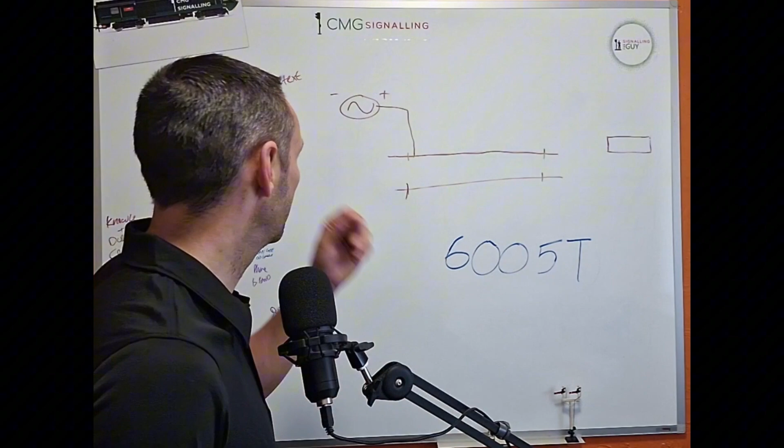And you will still see it in large parts of Scotland where the whole thing hasn't been relayed and reconfigured into letter names, but there are some letter name tracks in Scotland, plenty of them. And this is just my personal preference. So we've got 6005 track circuit.

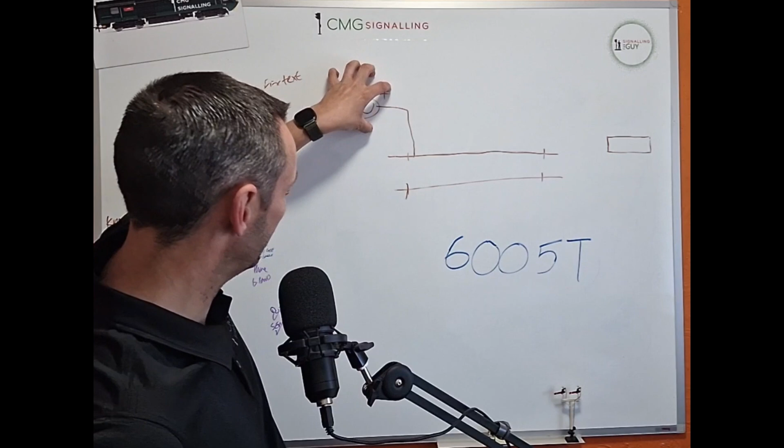So our track circuit is going to be the power supply, the rails divided up, electrically insulated from the adjacent rails. Remember, there's nothing impeding the wheel flanges here, so you can still run right through this track, and unless you knew what you were looking for, you wouldn't really see these.

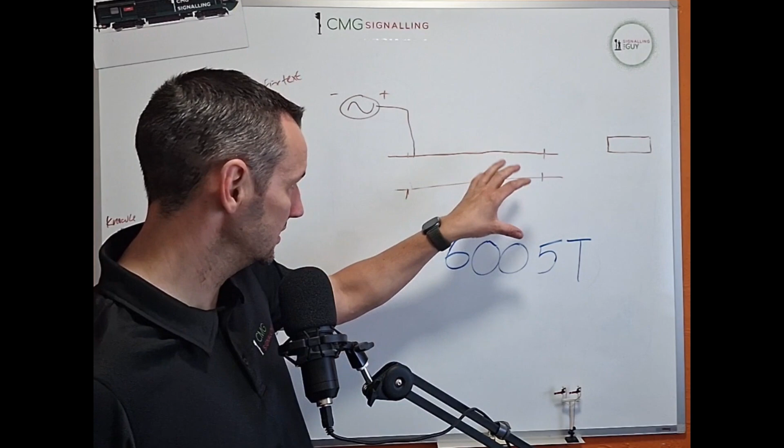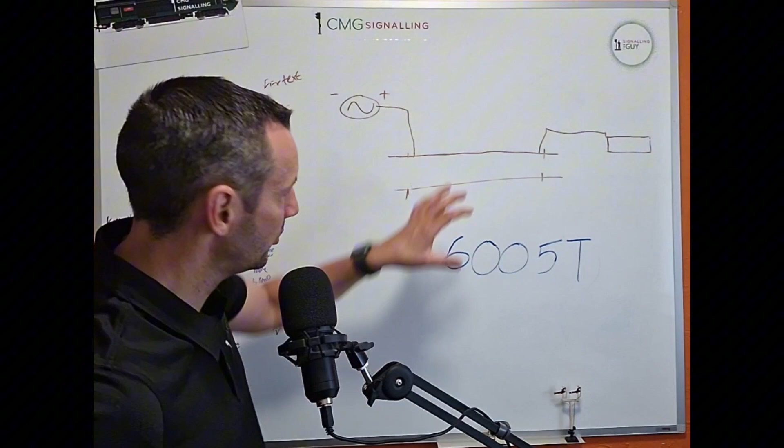And at the other end, no more than 1,000 metres - again, broadly speaking, one of the limitations on track circuits is length, so no more than 1,000 metres. And we take our power supply and we feed it from the rails into a relay. Now this is where it gets interesting.

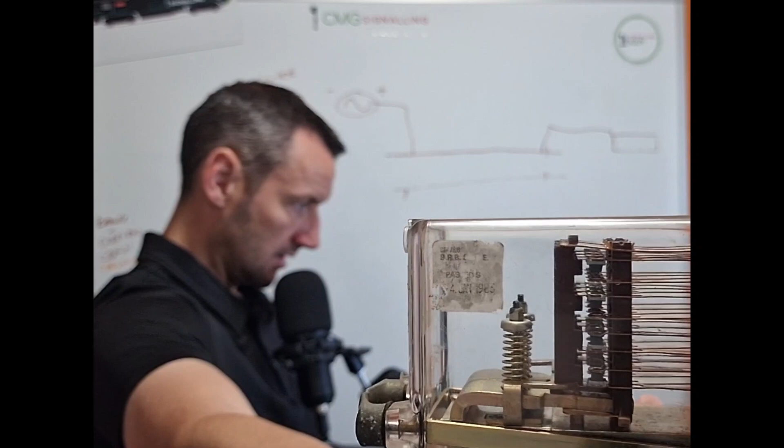So when I energize the coil, that gap is going to shut. Electromagnetism is going to force that gap shut. And then, as you can see at the top, if I position this properly, you can see that there's some contacts in there, and they are open at the moment.

So they are front contacts, which are open when the relay is de-energized. Listen, it's not energized, it's not plugged into anything, so it's de-energized. It is down. So when signal engineers say it's down, we mean that the back contacts are made - you can see them at the bottom. When it goes up, that brass arm will flip up towards the coil, and it will push those contacts at the top closed. That's what we call the relay being up.

So relays are used for other things other than track circuits, so we say relays are up and down. When we talk about tracks, sometimes we still say the track's up or down, being a bit lazy with our language. What we mean by that is that it's either clear or occupied. Right now, this track circuit is clear because there's no trains on it.

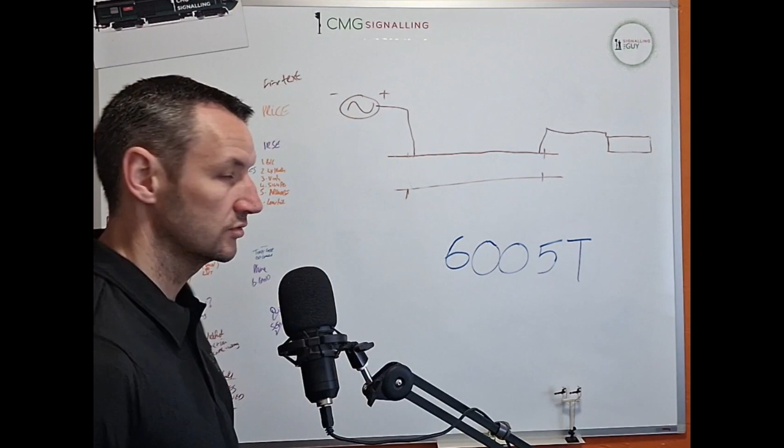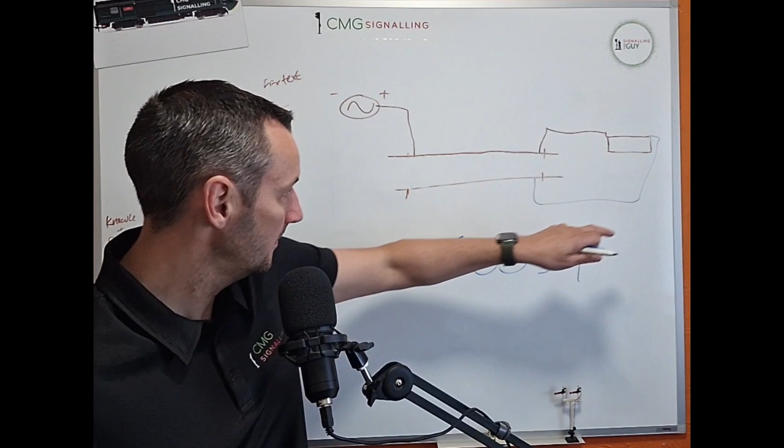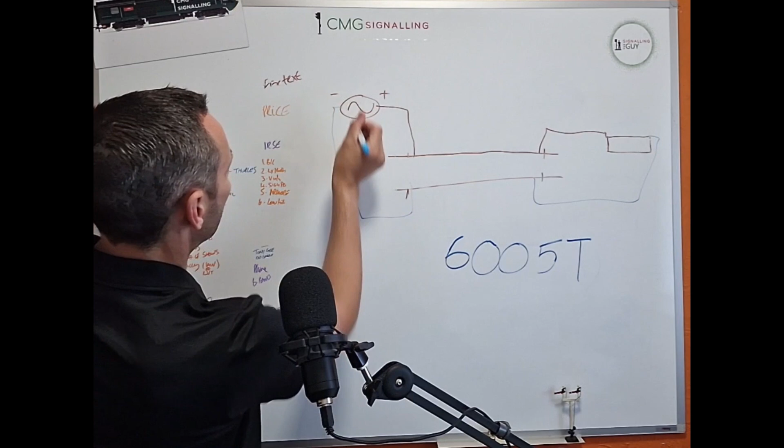But it's not a complete circuit yet. So to complete this circuit, the other side of the coil also has to be cabled from a relay onto the track. Of course your track are contiguous conductors, and at the opposite end of the track we simply feed back to the supply, and that is our full circuit. So right now we have got a full circuit, our track circuit is clear, and our relay is up.

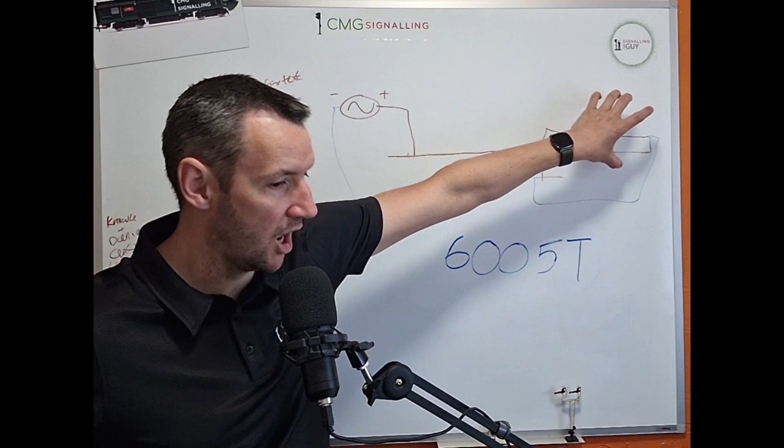So how are we going to change that? Well, there's a number of ways we can change it. So that's how our track circuit operates normally - spends most of its time clear with the relay up.

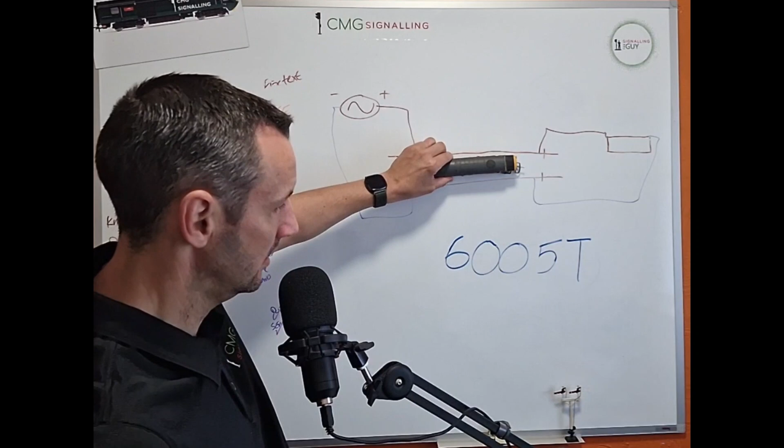Now we're going to bring along our train, and this train, like most trains, if you look underneath it, the wheels are joined together and they're metal and they conduct. So when we put our train across our track circuit, what it does - keep in your mind our train is still on our track.

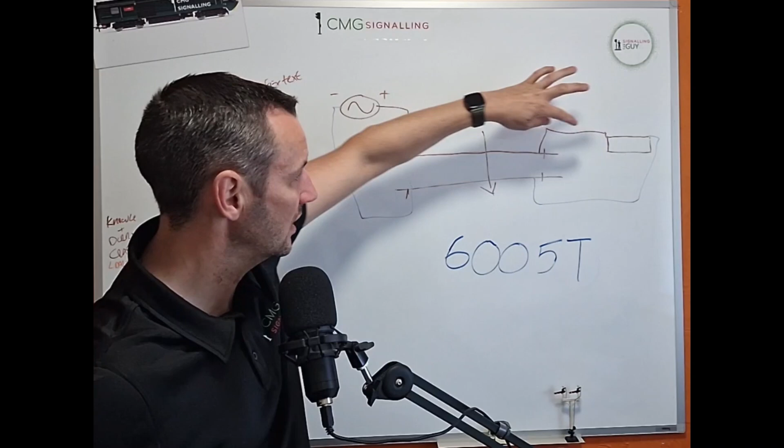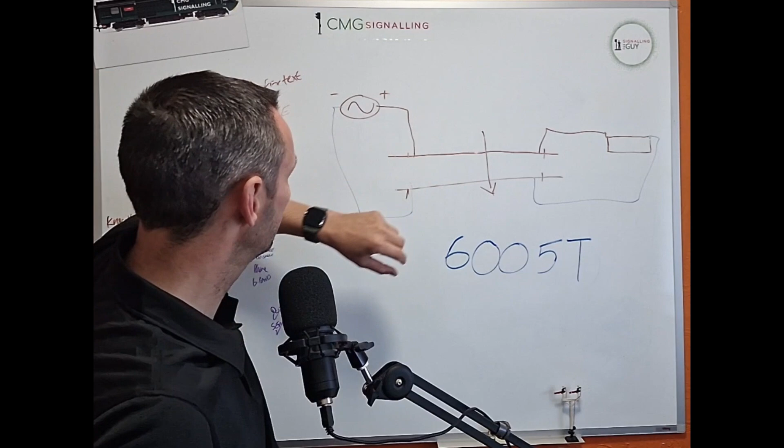It creates a current path across our rails. These rails aren't joined in any way - they're electrically insulated from the rails adjacent to them longitudinally, and they're also insulated from the rails across them. But the train's wheels come on there and they short out the rails. That means you don't need to know a lot about electricity to know how this works.

But it means that electricity, if you want to think about electricity as lazy, it wants to take the shortest path to get back to the supply. So it doesn't want to go all the way up here and through the relay when there's a nice short path here, and it can go all the way back to the power supply the easy way. If you want to be a little bit more technical, it is about choosing the path of least resistance - that's why I say it's lazy. There's more resistance going this extra length of rail through the relay coil than there is going the nice short path.

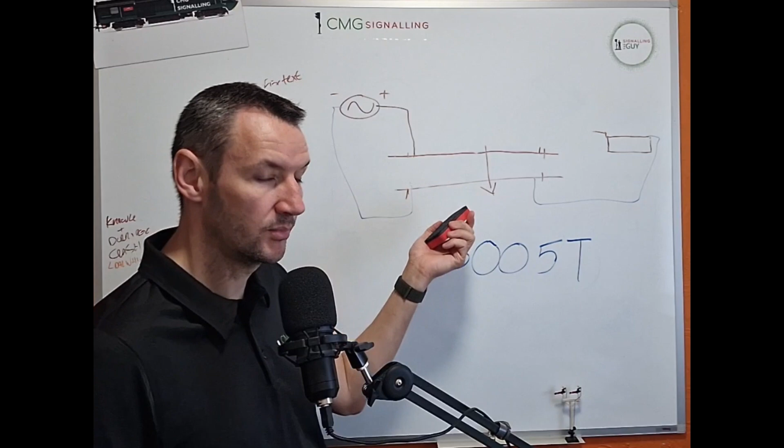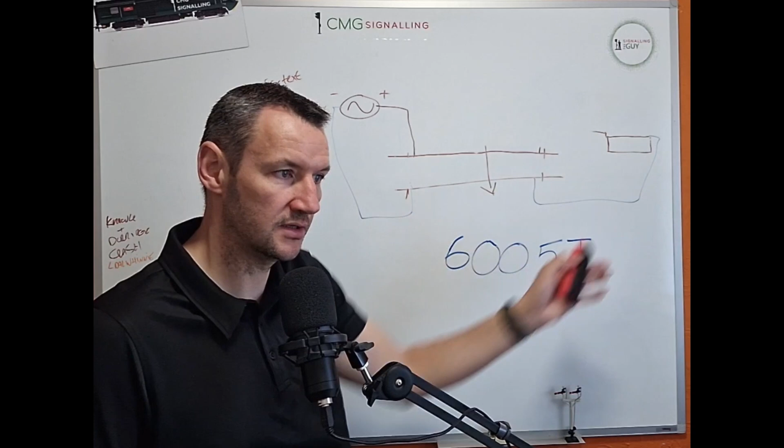So that is one way in which our track becomes occupied and our relay drops. Now we use the contacts in the relay to tell us what situation the coil's in - is the coil energised or de-energised? Outside of equipment failure, that operates pretty well in thousands of instances day to day, from not quite Land's End to John O'Groats, but a large section of the UK railway.

I said that length was one of the limitations of track circuits. There are some other limitations - some other things that will occupy your track circuit that aren't actually trains.

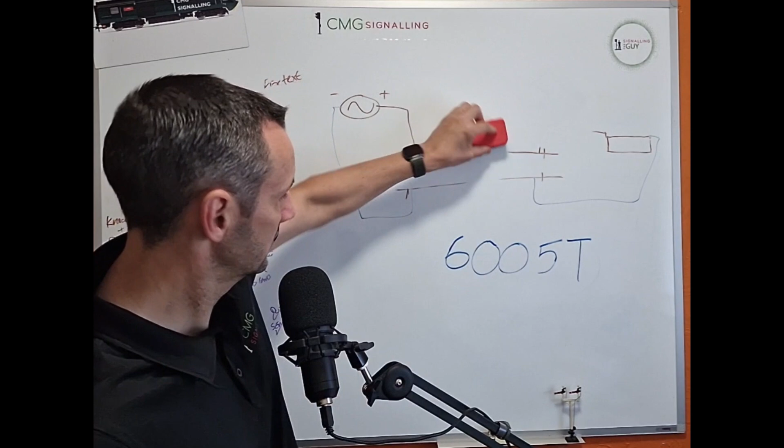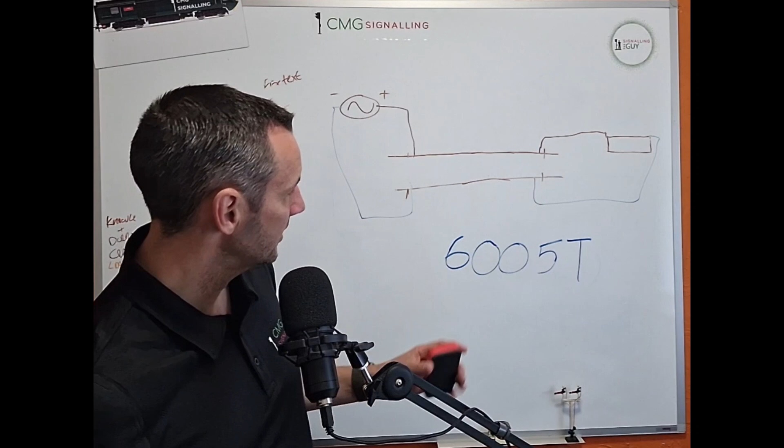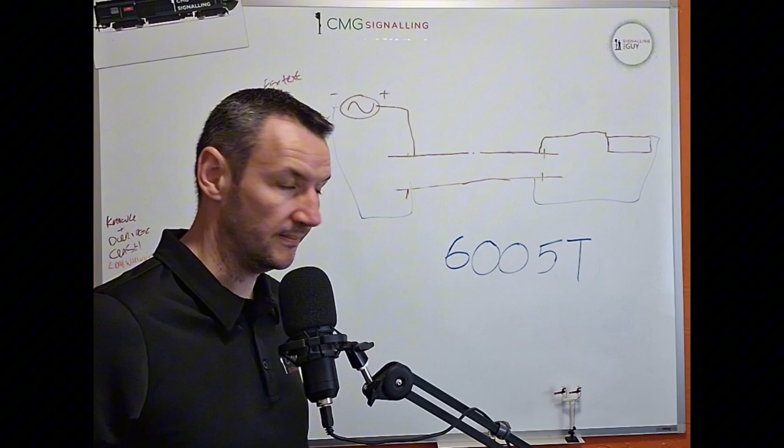So if we reinstate our clear track circuit with our relay up, relay energised - any break in the rails will drop your track circuit, will occupy your track circuit. In some cases that sounds like a really bad thing, but in some cases that's really good, because if you've got a broken rail, you want to know about it. There is also something which is becoming more and more common and an increasing problem.

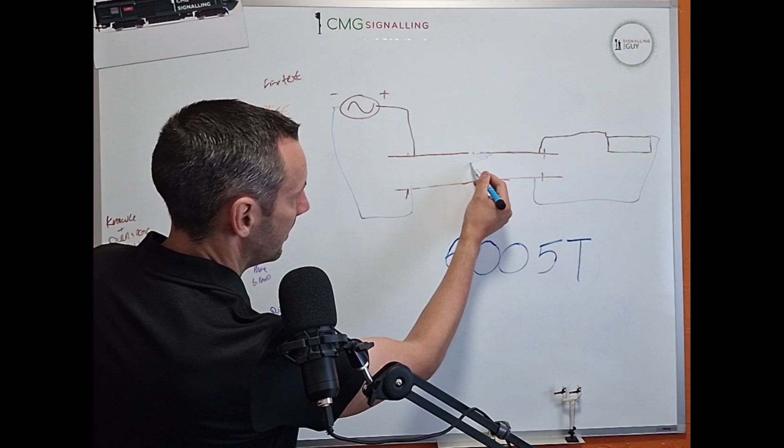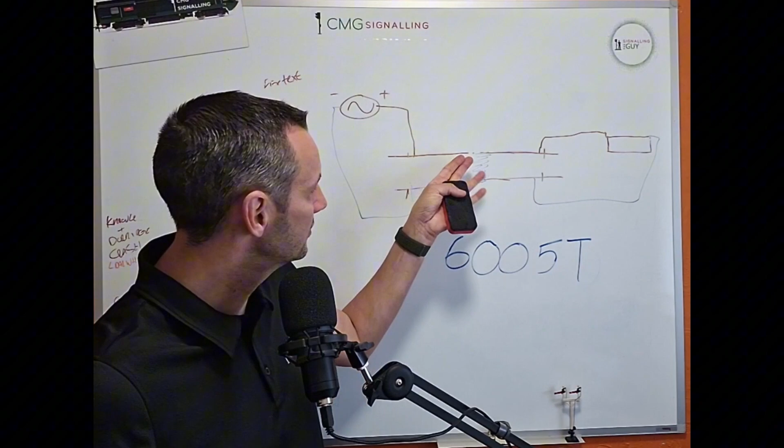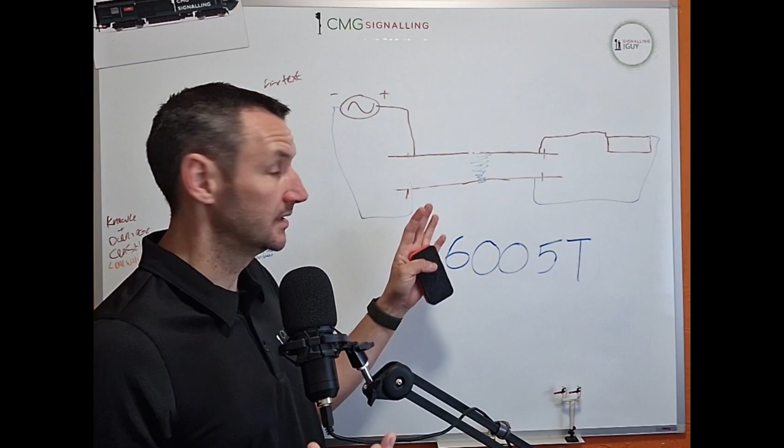The blue stuff, water. So flooding in a track circuit will actually short it out, if it's flooded enough and you get a path with low resistance, remember water conducts electricity. So if you get a water path between your rails, a flooded bit of your railway, your track circuit's going to be occupied. Is that a bad thing? Depends how bad your flooding is. If your flooding's really bad and your track circuit's occupied and trains can't run through it, not a terrible thing.

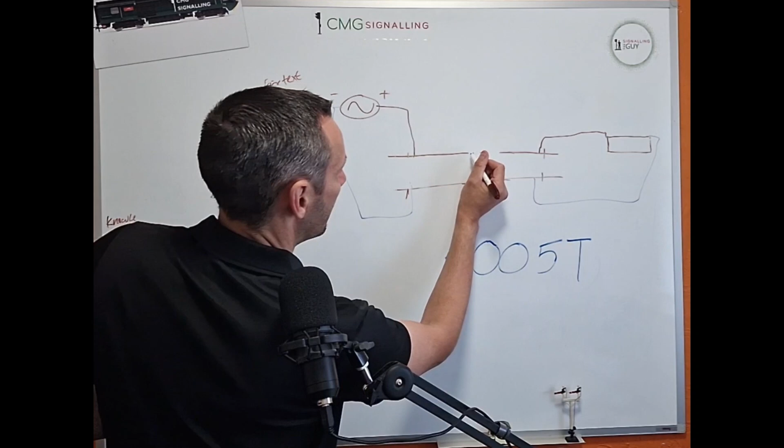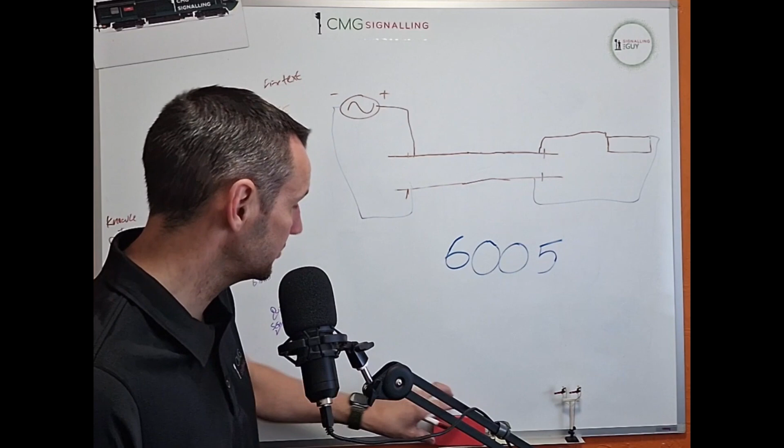Now if we reinstate our track circuit, overcoming the limitations of our track circuit, one thing we can use is the axle counter. So track circuits are a method of train detection, so are axle counters. So what we do in the instance of axle counters is we fit what's called count heads to the rail.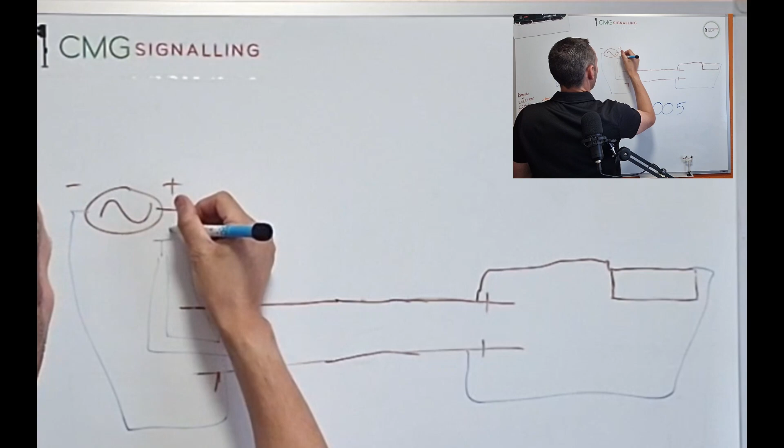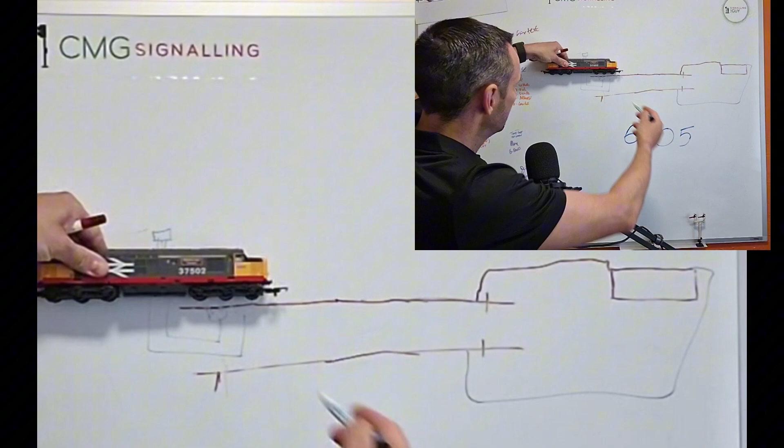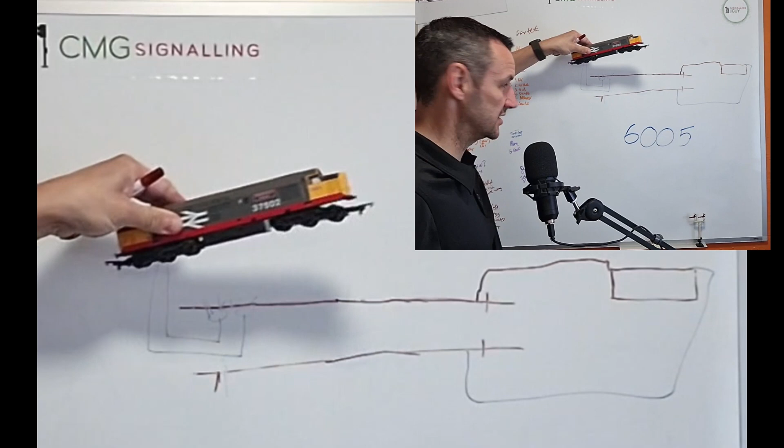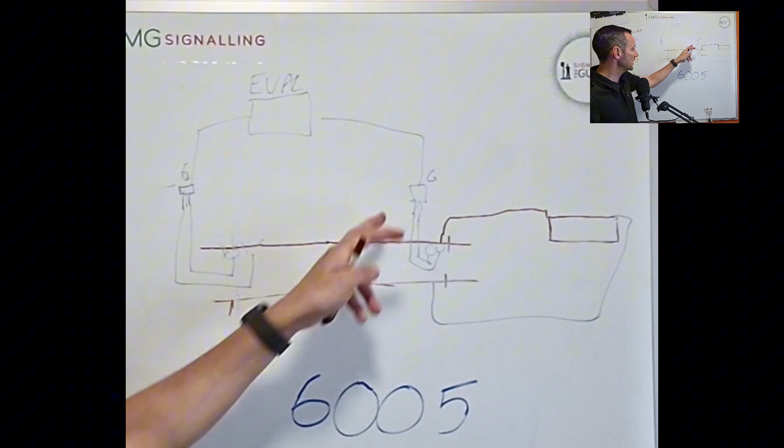Associated with the same brains, which is called an evaluator for an axle counter, there's another set of count heads at the opposite end of your train detection section. Remember, it's not a track circuit, it's an axle counter. So again, our 6 axles pass over the count out head, and that counts up to 6. Or effectively what it does is count from 6 at the evaluator back down to 0. So 6 wheels in, 6 wheels out, and the evaluator decides if all the internal equipment is operating correctly, then a full train has passed through.

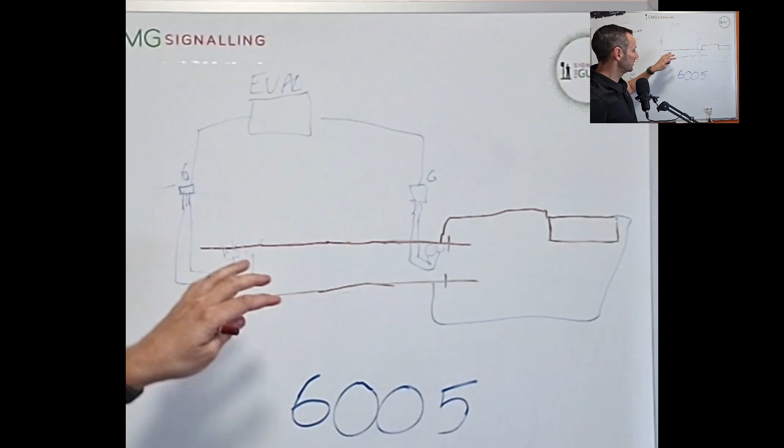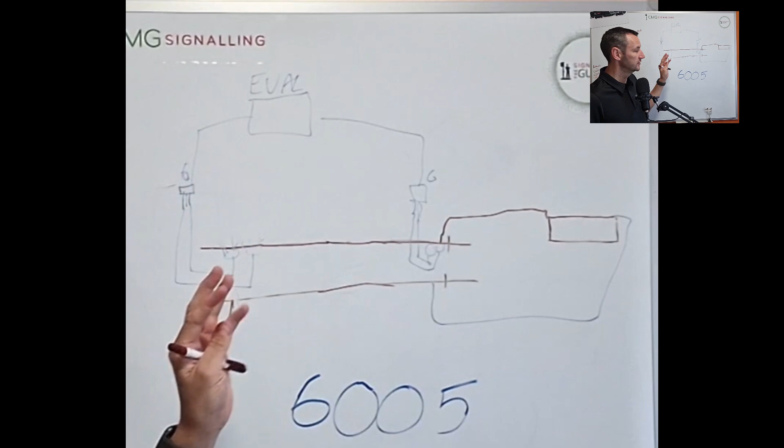We can be reasonably confident that if 37502 was hauling 20 coal wagons, each one of those axles would be counted, and if a wagon was detached and left in the middle, its wheels wouldn't be counted out at the end. This seems very simple, but it's a very reliable way of detecting train movements.

There's a slightly different nomenclature for this. So 6005T now becomes brackets X, to let you know that it's an axle counter when you're looking at signalling drawings. And one of the things you might have already picked up on is this: 6005 no longer detects broken rails, and 6005 no longer detects flooding.

One of the first applications of axle counters was in areas known to be susceptible to flooding, coastal places, and examples like the Severn Tunnel. So here we are, our setup on the day. Now it's really important that we figure out how it should work first. You can see inside the Severn Tunnel, we've got X's, 6005, 6007 - these are not the real numbers, just chosen for this exercise. Those X's are axle counters because the tunnel is too wet for track circuits to operate reliably for long periods. So what they did was bring in axle counters and trial them.

If you think back to the explanation of how track circuits and axle counters work, you can have them both operating at the same time on top of each other - they don't actually interfere with each other. So that's what they did. They trialled these by running them together for a year to make sure the axle counters behaved the same way the tracks did. And they did. So by 7th of December 1991, they are using exclusively axle counters at this point, but they have been trialled for a year.

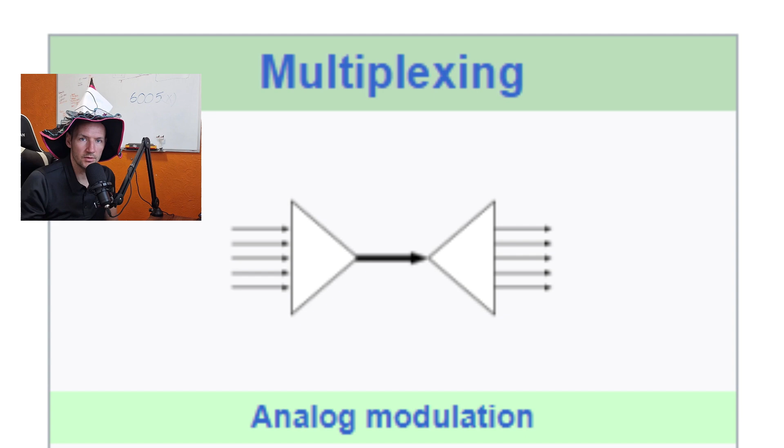The only important thing to note, other than my craft skills, is that at the Severn tunnel, the TDM was goosed. It was burst. So it's not sending the information back to the signal box. So what they could do is that the information's in the local relay room, so the signalling equipment can still work, the interlocking can still work. It just can't send and receive information back to the signal box. So it means that there is still a certain amount of automatic working happening at Severn tunnel.

So the technicians are on site trying to figure out what's wrong with the TDM. That's failed. There's some other telecoms equipment failed. And into that mix, as I've said before, accidents aren't just one thing that goes wrong. If you've watched the other episodes, you heard me talking about Swiss cheese. There are layers of defence in our systems that stop things going wrong. But the first thing that went wrong here was that the TDM failed. And we'll have a little look at how the report says the signal box is working then. And I'll also take off the hat.

Back to this HMRI report then. Just to highlight how poor the track circuits were performing in the tunnel, the humidity and temperature had led to many right side failures. That's failing properly, failing in a way that you expect and that's safe - showing the line occupied, so it looks like there's a train on there but it isn't. It's the physical conditions causing short circuits when no train was there.